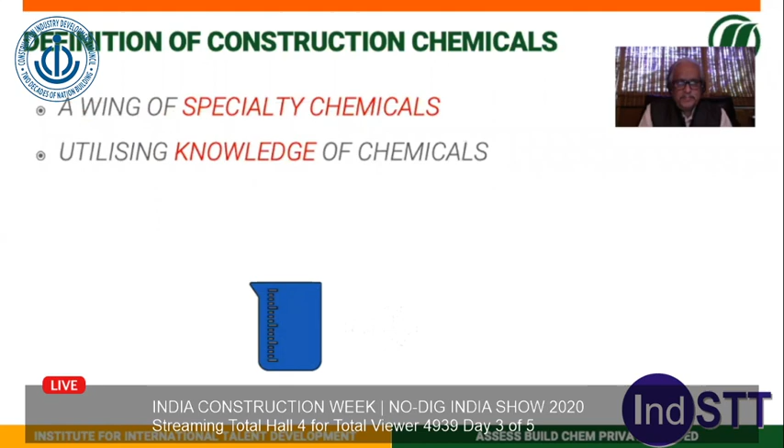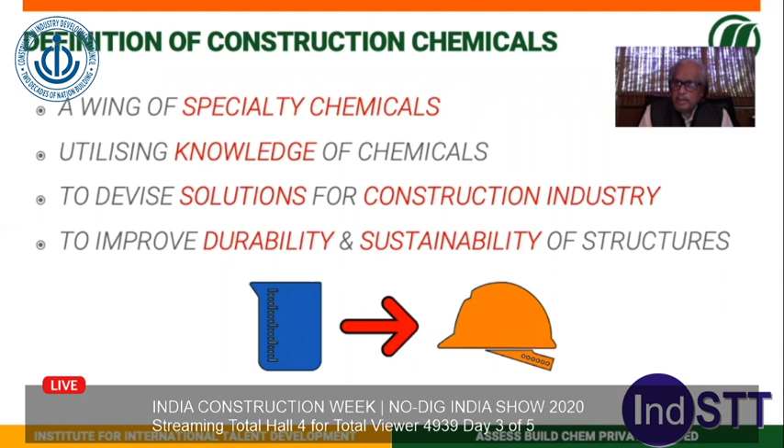We are categorized in specialty chemicals. We are engineers who know about chemicals, and we are chemists who know about concrete. We devise the solutions. In fact, this industry grew from the solutions that are asked of us by the construction industry. They wanted a self-compacting concrete, so we had to give them a concrete which compacts by itself. So we have to manufacture that particular chemical which aids making concrete self-compacting. Ultimately, the whole aim is to make the concrete more sustainable, more durable, so less recycling, so that the environment is protected. Our expertise, as I said initially, is concrete enhancement.

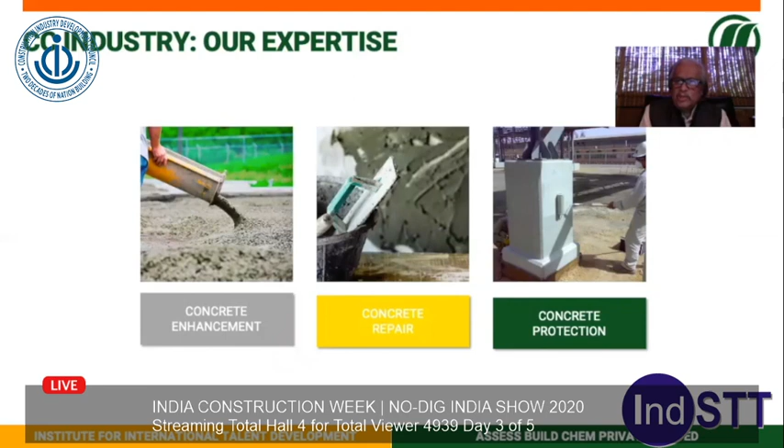We help during construction, concrete repair, when the concrete is exposed to difficult conditions, we repair the concrete, and to avoid the repairs and to make the concrete durable, the third and most important function is concrete protection.

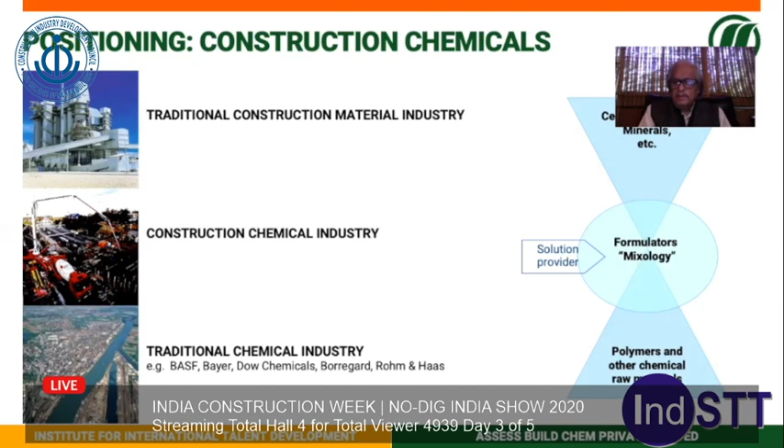Traditionally, we are sandwiched between two big industries. On one side, there is the construction material industry, like cement, minerals. This is a very large industry, the large players. And then there is the traditional chemical industry, which is also equally large, because cement is also our raw material, minerals are also our raw materials, chemicals are also our raw materials. So in both cases, all our inputs come from large multinationals or large organizations. Our technology is the formulation technology and mixing and blending technology. We provide solutions by combining both these things. So we are sandwiched between all big companies, and we create a value addition.

We increase the efficiency of construction, so the construction becomes more economical. We increase the strength of concrete, so we make very small dimension columns and save a lot of space for the builders. We make the concrete beautiful. We make the concrete aesthetic. When you use construction chemicals, you also can get a good surface. So we can even go to the extent of making a fair faced concrete, which looks very beautiful. It is gray and it is concrete.

Safety is one of the most important things that we provide. We protect the structures. Protection of structures is very, very important in these times of pollution. To do a preventive maintenance and to reduce the costs of repairs, protection and maintenance are some of the very important steps that our industry should take to save resources. We increase the span of the building by giving it protection or by repairing it, which automatically increases the life of the structure. So the life cycle costing becomes less.

And most important is what we have been doing since a few years back: we are making the buildings energy efficient. We have insulation systems which, when applied to the construction, can save your cost on electricity. It can reduce the temperatures in the living areas, and this is a large contribution. We save the air conditioning costs.

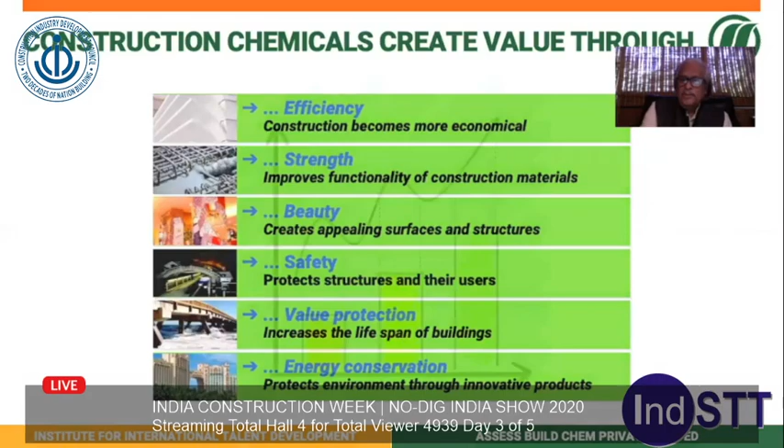This helps the sustainability on the whole. Just a few numbers. As per some latest data which has been taken from the internet, our market size is approximately 9,000 crores, 9 to 10,000 crores. The growth rate, which was supposed to be or estimated as 17% CAGR, due to COVID, is a little bit less, 9%. Hopefully, if we can achieve it, it is very good.

There are about 500 to 600 players, known players, and there are still hundreds more which are not known or we do not exactly categorize them because they make a single product, like a single waterproofing compound. The companies involved in construction chemicals are from a wide range. That means we have companies which are 100% subsidiaries of multinational companies, which are manufacturing construction chemicals all over the world. We have large Indian companies.

We have large paint companies manufacturing construction chemicals. We have 100% Indian companies who are also manufacturing construction chemicals with their own technology. We have foreign collaboration companies. These are joint ventures between the Indian companies and the foreign companies. We have MSME and small scale industries in this sector.

So what happens? This whole market is to be catered by all these types of companies having different constitutions, and that gives this particular industry a lot of difference compared to the other industries. Just to give a data, the turnover of the top 10 companies is about 50% of the total turnover of the industry.

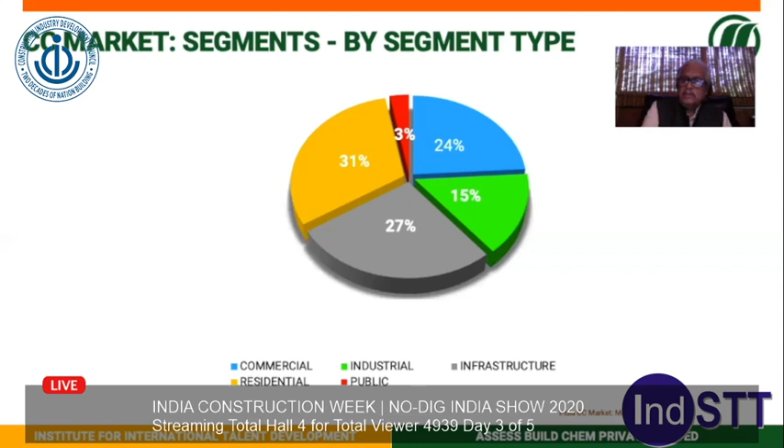A few trends: the rising consumption of the population. We have schemes from the government, PM Awas Yojana, which will give a lot of housing, which will directly benefit, indirectly benefit the construction chemical industry.

There's urbanization. There is a trend that people from villages are slowly coming to the cities. So with this urbanization, new structures will come, new markets will come, new infrastructures will come, which will lead to growth. Resource utilization: compared to other parts, India is a very, very vast country, and the land covered by construction is very less compared to other developed nations.

A lot of investment is coming into the IT industry, as well as a lot of investment is coming into the health industry. Every industry at the end of the day needs construction, and that is the advantage of our industry. In whatever constructions, our industry has got an entry inside.

Growth drivers: increasing investment in infra projects, growth in urban housing, increase in FDIs leading to the boost in the industrial sector, repairs of the existing infrastructure. This is a tremendous market, unbelievable market. And if we start taking cognizance of these repairs to retain the durability and enhance the life of our civil engineering assets, this would contribute tremendously to the construction chemical industry.

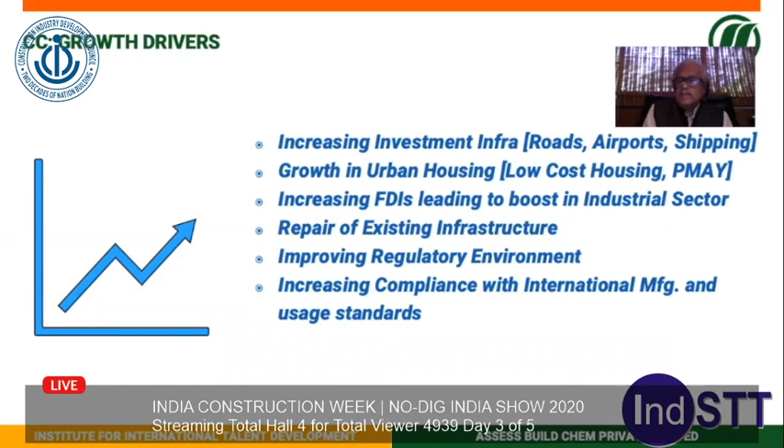Where a regulatory environment is there, and increasing compliance, we are playing with the international players. So that too is a growing trend. There are limitations. Which are the limitations? As I said in the beginning, our industry is sandwiched between the giants, whether it is for cement, minerals, or for the raw materials. So we are in between.

Our suppliers are top level companies, so we have very less control on raw material pricing. When we are selling to the larger companies, they have tremendous bargaining power. They need tremendous financial terms in terms of credit, and we have to provide it. Whereas the industry, as I said, ranges from multinational companies to MSMEs. So this is one of the very restraining factors.

Credits and payments. Now this brings us, especially the small players, into cash flow troubles. Then there's competition from the unorganized sector. The unorganized sector is neither members of our associations nor in the mainstream, but they manufacture one or two products, and purely by virtue of their personal contacts and their pricing, they still enter the market, and they keep on growing.

There's a lack of awareness. The customer is not very much aware of the materials and where they are to be used, and this is a big restraint which we try to fill up. I'll just come to it. And lack of adoption based on the price concept. This is one of the main things. These are the challenges which we met.

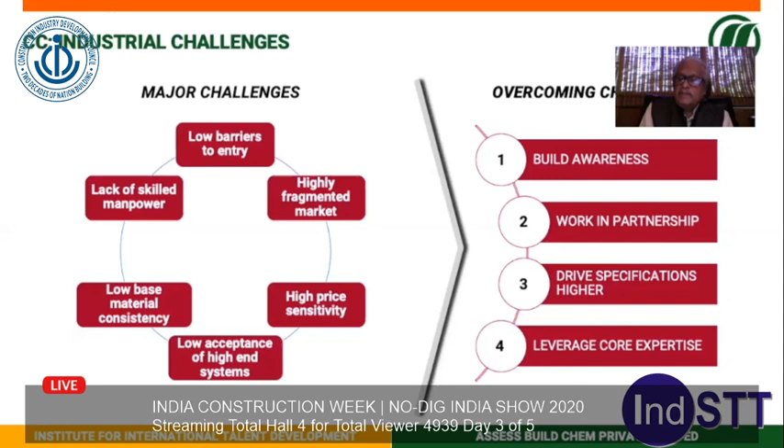To this effect, we formed an association called Construction Chemical Manufacturers Association way back in the year 2012. This is an apex body which represents a very small portion of the construction chemical manufacturers who are really interested in coming to a forum. They are really interested in making the product as per the international standards. They are really interested in being part of the industry to bring in awareness.

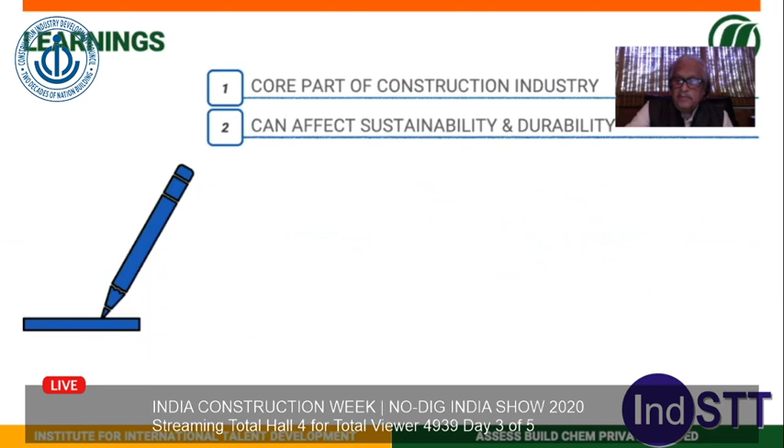So we have about 60 members. If you see, the top names will be part of the organization. These people have been already working for the past 7-8 years, and Construction Chemical Manufacturers Association has done a lot of efforts to bring in the awareness, whether by means of presentations, webinars, seminars. These are the actions which we have taken.

Training programs for the end users, training programs for the construction chemical industry so that they become aware, tie-ups with professional bodies for documentation, conferences, seminars, national and regional. We have done both of them, working with BIS, CIDC, Engineering Council of India, development of codes of practice, which is coming slowly, but still it is coming. We are getting standardized. Development of handbooks.

Indian Concrete Institute has done tremendous efforts, and now the handbooks on admixtures and handbook on waterproofing are almost seeing the light of the day, and we already have handbooks in ECI on precast, in ICI in precast construction as well as industrial floorings. So a lot of work has been done by the professional bodies, and this standardization is coming.

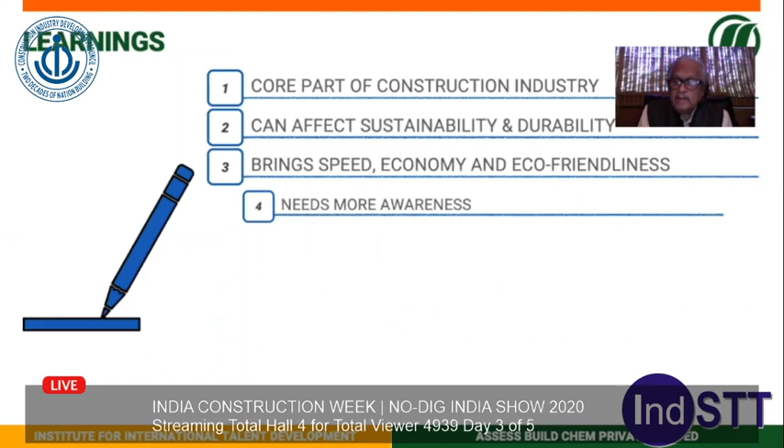Creation of awareness slowly: compared to 20 years back or 30 years back when I entered the industry, the awareness level is today quite high, and industry standards are also increasing. The international players are coming in, international standards are coming in, and hence more and more standardization is coming in, and high standard products are more acceptable as of today.

So what are we learning, or what are the conclusions? We are a part of the construction industry. We can affect the sustainability and durability. We can bring the speed and economy and eco-friendliness. It needs still more efforts in increasing the awareness. It is a mature but slowly expanding industry.

We should directly go into the specification. It needs a better further organization. We need a stronger organization. Many more people to come and join this movement. Faster codal developments and handbooks. Academic and professional training. This is coming up in a very nice way.

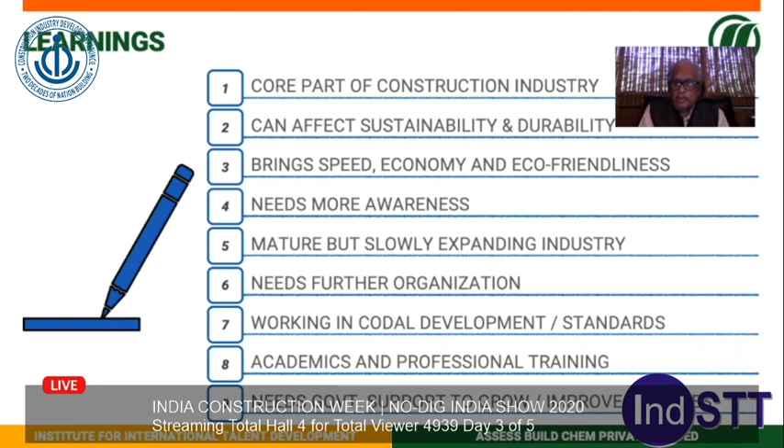The IITs and the other top level bodies, they are trying. AICTE is involved. CIDC is having skill development. So this is going on. Of course, we need government support at the end of the day to bring in more standardization, more awareness, and as I mentioned to start with, to sum it up

in the conclusions, we will need a lot of support from the government with respect to the liquidity, with respect to standardization, with respect to the skilling, and in addition to all the efforts that we are doing, help from CIDC, help from ECI will be very much appreciated. We shall definitely come out of these times. And once again, I thank CIDC for making this initiative to revive